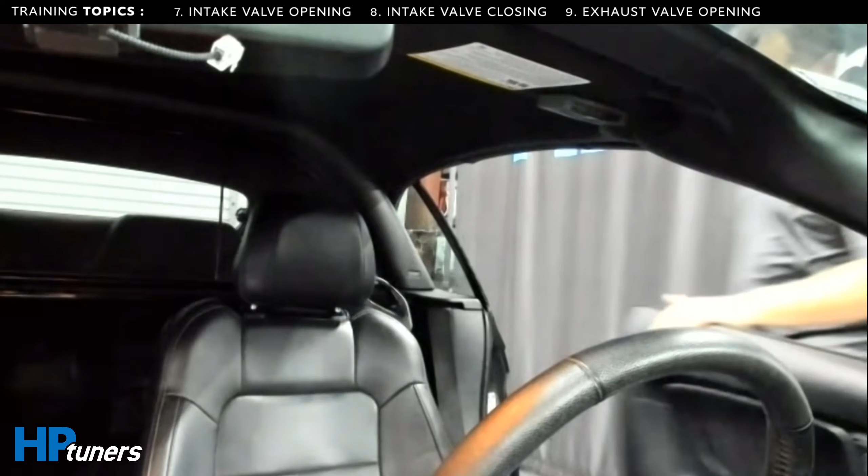All right guys, now I'm here back in the 2015 Mustang, and we're going to get started talking about today's topics. Before we get into actually tuning the car or making adjustments to the valve timing, I'm going to discuss some of the basic theory and principles behind valve timing and valve events and how that's going to affect how your vehicle is going to run. So without further ado, let's get right into it.

First and foremost, we want to discuss valves and their purpose. So what is a valve? For some of you that don't know, a valve is essentially a doorway which allows airflow into the combustion chamber and also spent air fuel mixture out of the combustion chamber through the exhaust. So you have two different valves, and the sizing of these valves has a great impact on how your engine will operate.

The larger the intake valve, typically the more airflow you can get into the combustion chamber. However, the larger you go on the intake valve, the less room you have in the combustion chamber to fit a large enough exhaust valve. Now, what's the best ratio? Well, typically your exhaust valve is always going to be smaller than the intake valve because we need to get as much fresh air charge into the combustion chamber as possible. If we don't do that, there's no purpose in having a large exhaust valve, because if you can't get enough fresh air charge, air molecules, into the combustion chamber, there's no point.

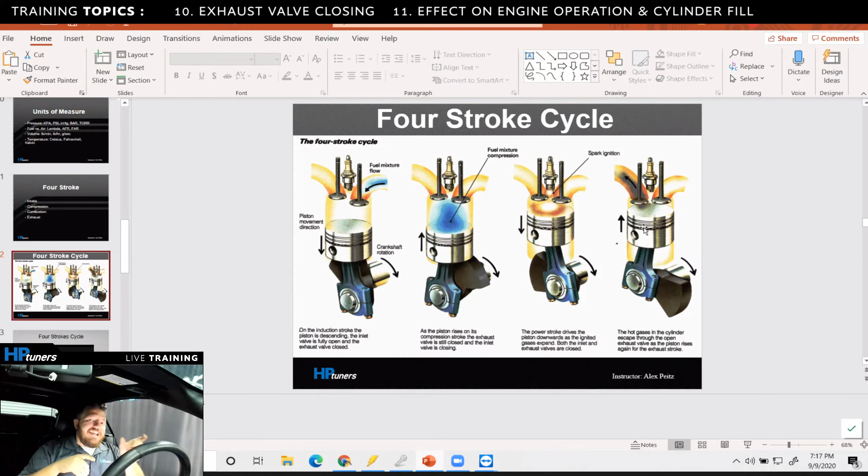But at some point before top dead center, my intake valve will start to open. Now, if it opens after top dead center, that's fine, you'll see it referenced as a negative value on your cam card. If you look at any cam card, you're going to see intake valve opening, intake valve closing, exhaust valve opening, exhaust valve closing. Typically it's going to be a positive value, pretty small, within 0 to 5 degrees or so. Sometimes it could be negative, so it really depends. But nonetheless, it's referenced in degrees before top dead center.

So for the purposes of this demonstration, let's keep it simple. Let's say your intake valve is going to start opening 2 degrees before top dead center on the exhaust stroke, right?

One second. Yes, let me maximize this for you guys. All right, that will work.

So maybe you guys can see this a little easier now. The piston is traveling back up to top dead center on the exhaust stroke. That intake valve opens, let's say 2 degrees before top dead center. And now there may be a short period of time where the intake valve is open and the exhaust valve is about to close. That period of time is referenced in degrees of rotational movement. So let's say you have 10 degrees of time in which the intake valve and the exhaust valve are both open.

That is the amount of overlap you have in this particular camshaft. Now, the more overlap you have, the less cylinder pressure you're going to generate, or you're going to lose more cylinder pressure. But that could also help with what's called scavenging. If your exhaust valve is open at the same time as your intake valve, you're actually going to take advantage of the fact that the cylinder pressure is going out and you're seeing a more negative pressure, we'll call it that. That's going to draw fresh air charge in more so than if your exhaust valve was shut. So you're using that scavenging effect to draw in more fresh air charge, but then you're going to slam that exhaust valve shut, and now you're trapping those fresh molecules, the fresh air charge, into the combustion chamber.

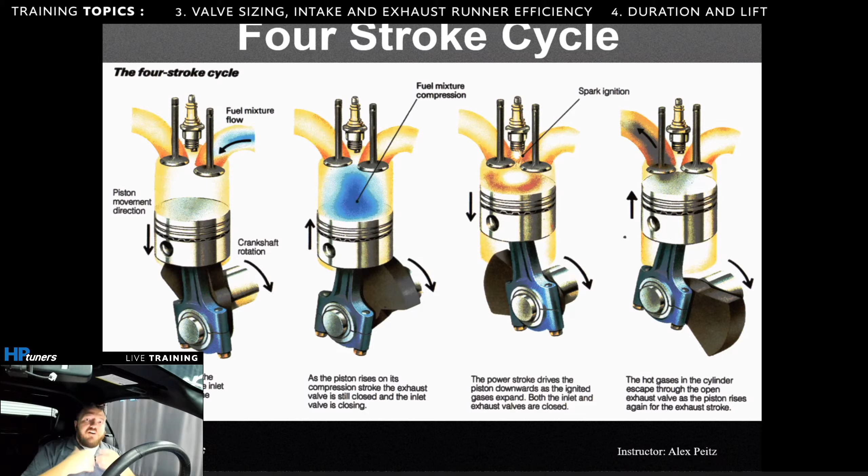Hopefully that makes pretty good sense to you guys. I tried to generalize as much as I could. Of course, it's kind of difficult because it is a pretty complex topic. I'm going to demonstrate more of how this works with the Mustang, so I think that'll make it more clear for you guys.

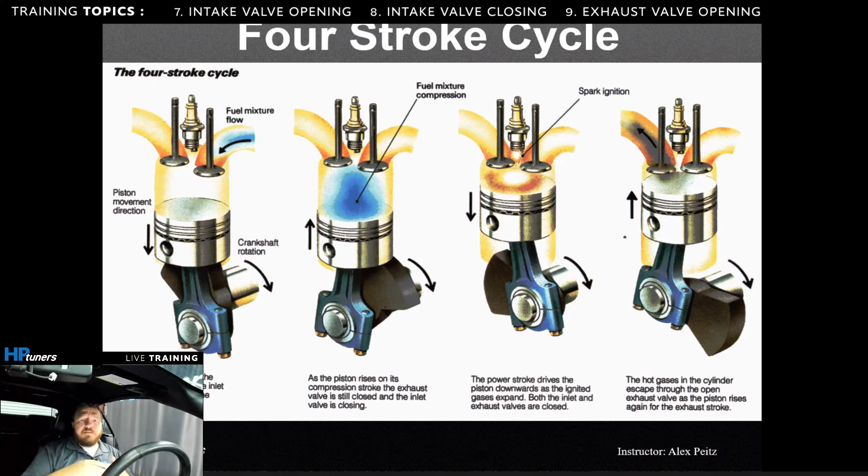Let's talk about one thing we didn't discuss really, and that's pumping losses. That goes back to our exhaust valve opening angle and exhaust valve closing angle. The earlier that we open the exhaust valve, the less pumping losses we will have because we're generating less cylinder pressure at that point—we're relieving the pressure sooner. Pumping losses is basically a loss of power due to the fact that the piston is having to work harder against cylinder pressure. So if you relieve the cylinder pressure sooner, you have less pumping losses.

Now, that could come at a cost, though, because you may lose some horsepower because you're letting go of that cylinder pressure too soon. On the back end, when the exhaust valve is opening, we talked about the scavenging—you may not get as good of that scavenging effect, because the more cylinder pressure you generate before the exhaust valve opens, the better scavenging effect you're going to get while it's open. And then when that intake valve opens, we're getting a lot more fresh air charge.

An analogy I used to teach some students back at another school I taught is, you're at a bar, right, and you got somebody... yeah, never mind, I won't get into it. But you want to get the people that you don't want in the bar... you want them out, right? You don't want people drunkies hanging around there. But nonetheless, guys, that's kind of how that works.

Let's move forward here. So, valve events' effect on engine operation and cylinder fill—we've basically been discussing that the entire time, and we could talk more about that later on, but I think we pretty well covered that. So I'm going to move forward. If you guys have questions, please let me know.

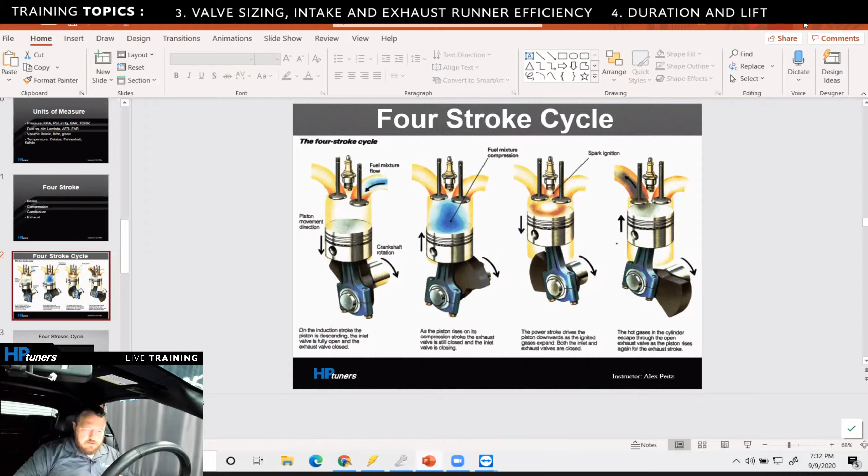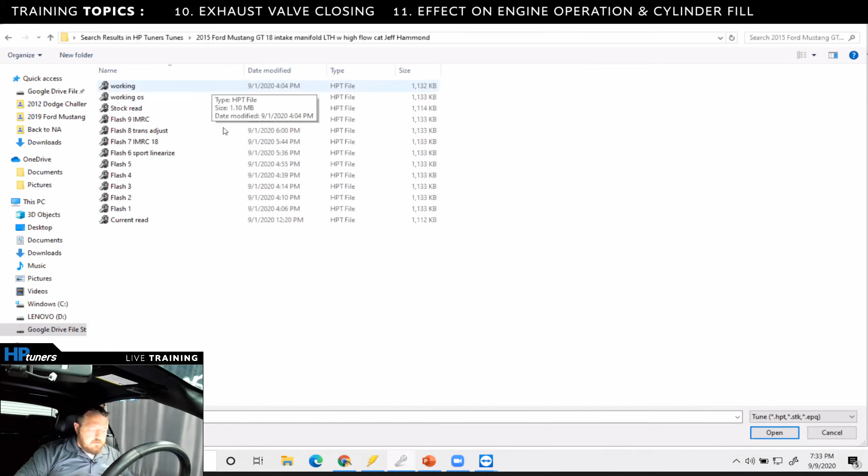So let's just show you that real quick. Let's get out of the Escape, let's go here. I'm going to open up this tune file. All right, so here's the 2015 Ford Mustang GT. Let's see here. All right, here's the latest tune file.

All right, so if we go to engine, we go to airflow, and we go to variable cam, you're going to see variable cam is enabled, and it's in twin independent variable cam timing, or TIVCT, however you want to say it. So these are basically the parameters which are going to affect our cam schedule, our cam timing, depending on RPM, depending on load, mapped points, so on and so forth. There's a lot of different variables which affect what's going to happen here.

So the first thing we're going to look at is our map points configuration, and we're going to see that 0 through 12 are enabled and 14 through 25 are enabled. So if it has a 0, that means 13, 26, and optimum power are not enabled. So that's just a good way to know what tables you're actually going to be using, or what map points are going to be active on this particular application.

Now, EcoBoost, 6 cylinder applications, they're going to have different map points enabled. So that's going to be another factor as well. For example, the Gen 1 Coyote in a 2011 Mustang is going to have optimum power cam schedule active versus this one, optimum power map point active versus this one does not. It still has a cam schedule for optimum power, but it's just not going to use the OP mapped point. Instead, it's going to use a combination of different map points based on our valve timing at that point, or our cam position at that point.

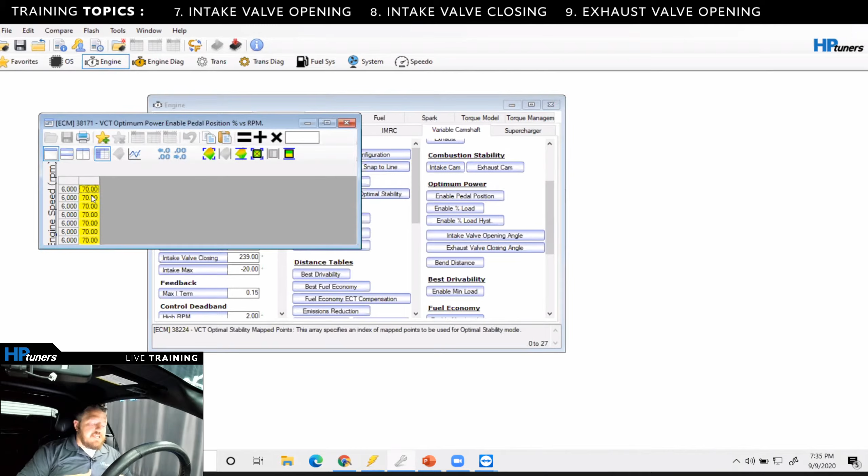So for the purposes to keep this easy, we're just going to look at the optimum power cam schedule. So there's enable pedal positions for that. This is set to 70% pedal, so 70% pedal and higher will actually enable optimum power cam schedule. This is our enable load, and so basically at 4,250 RPM, 91% load will enable optimum power cam schedule.

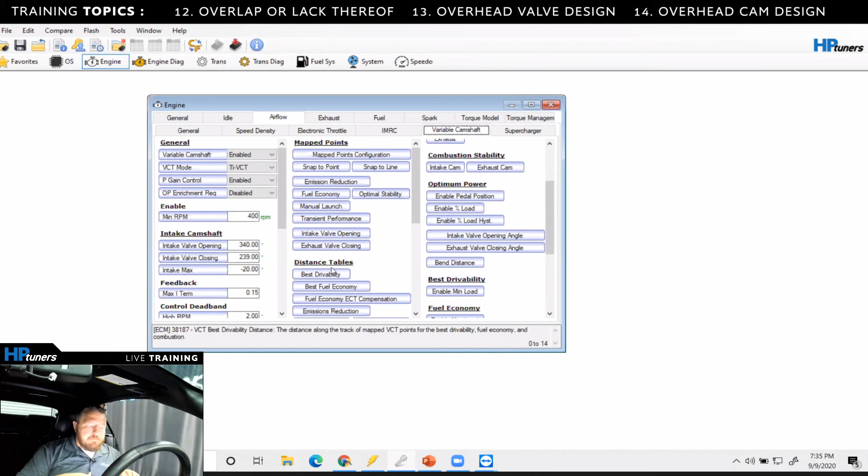So once it's enabled, it's going to disregard any of the other tables which you have under mapped points, under intake camshaft, whatever it may be. It's going to disregard this, and it's going to use this intake valve opening angle and the exhaust valve closing angle. So the intake valve opening angle looks like this, and we have our exhaust valve closing angle, which looks like this.

As RPM increases, our desired intake valve opening angle is going to change, and our desired exhaust valve closing angle is also going to change. Now, Ford references intake valve opening angle versus intake valve closing. It doesn't really matter, it's kind of the same difference, right? Because our duration, again, is fixed, so that doesn't really matter.

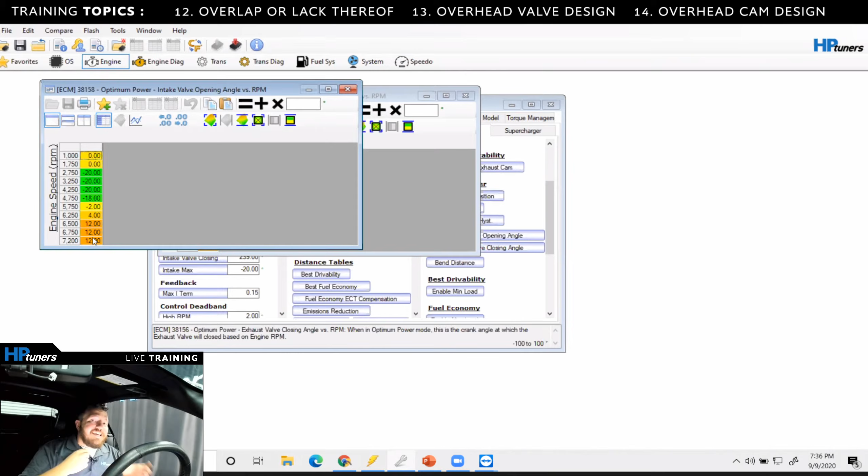So when you get to looking at the intake valve opening angle, you may not know what this means, right? Because we have -20, we have -2, 4, and 12. So this is just a reference point from the base position of the intake cam. So if we see -20, that means that intake cam is advanced 20 degrees from the base position. So that may be great for lower RPM to gain some low end efficiency potentially, depending on the application.

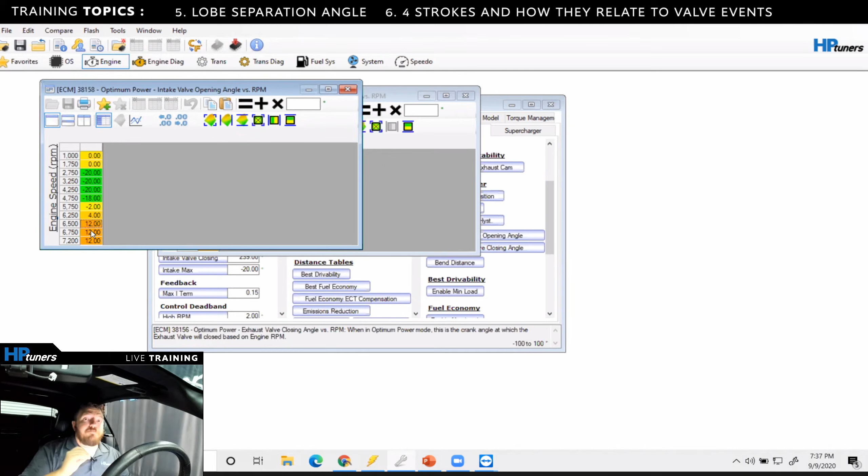But you don't want the intake valve opening angle too far advanced when we are trying to make power at higher RPM, because we have more engine speed. So we need to compensate for that by opening the intake valve later. As you see in this particular application, as you get to higher RPM, we have positive values. So that is degrees retarded from the base position. That means we've retarded 12 degrees from the base position, versus -20 means we're 20 degrees advanced from the base position. So if it were 0, it would be at its home base, its home position. Just keep that in mind.

And also, that angle at which the cam is at its base position is referenced in the calibration as well. I believe it's right here at 340 degrees. But to keep it simple, we're not going to get into all that right now.

So let's look at the exhaust valve closing angle. In this particular table, it pretty much is 8 and it becomes 15 degrees. That's pretty ideal for a car that may have different exhaust modifications, because that goes back to pumping losses. Now, in an off-road application, if you have a set of long tube headers, for example, on a race car, you're going to want to retard the exhaust valve closing angle, because you want to take advantage of that scavenging for as long as possible. The more efficient your exhaust is, the better you're going to get that high pressure out into a low pressure, because fluid flows from a higher pressure to a lower pressure. So we're taking advantage of those fluid dynamics, and we're going to use that scavenging to our advantage.

So the later you close the exhaust valve, the more fresh air charge you're going to draw in by taking advantage of the scavenging effect. So when we have a race car with long tube headers, whatever it may be, we typically want to retard our exhaust valve closing angle. But this will vary depending on your application.

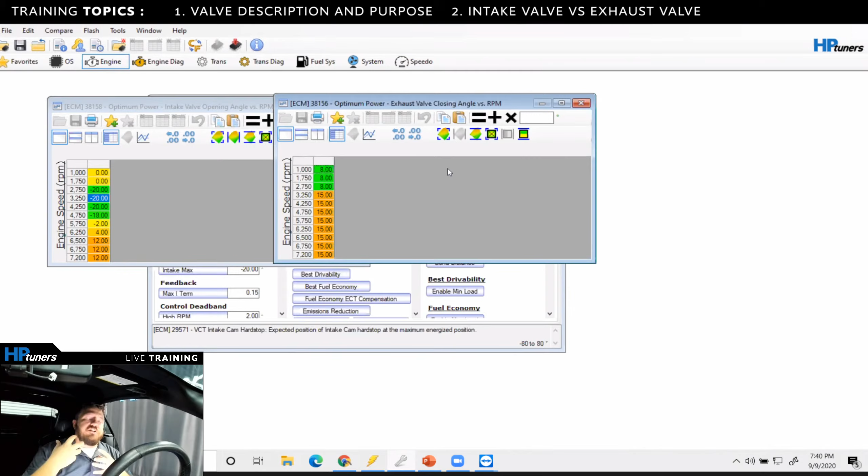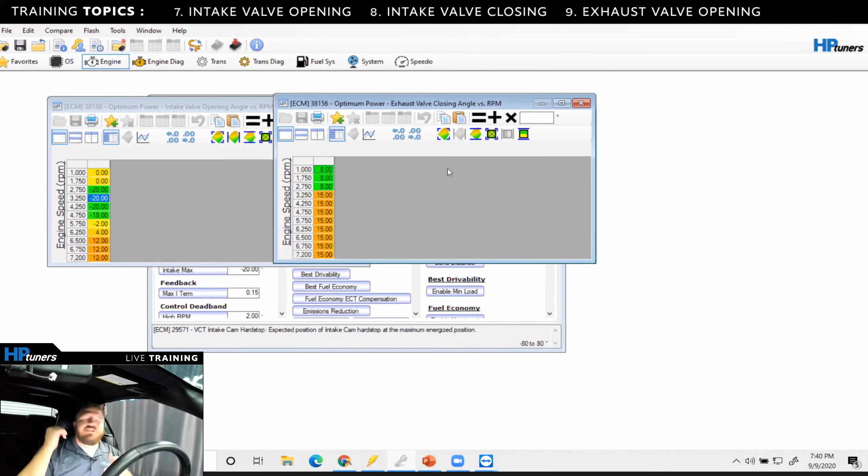Because with EGR, we can create a natural exhaust gas recirculation by affecting our cam position at lower RPM. Typically, you're going to see in some applications they retard the intake valve opening angle at lower loads and lower RPMs to create a natural EGR effect. So you're going to get some of those inert gases coming back in or staying inside the cylinder, so you have less unburnt gases essentially going out the exhaust. That's in a nutshell how that EGR effect is working.

So now we no longer need EGR valves. That's pretty awesome because those were a pain, we all know. But nonetheless, we can affect our EGR and improve emissions and clean air by adjusting our cam schedule. That's pretty cool.

20 years ago, people would be like, wow - maybe 30 years ago now, the time gets away from me. But nonetheless, what a great time we live in, guys. All right, so let's move on.

Considerations when choosing a camshaft. We've kind of been talking about this the whole time, but guys, just remember what you're doing with your car. It may seem awesome to have that big choppy cam, but there are downfalls, and I tell this to my customers all the time. Yes, it sounds cool, however it's not going to drive like stock.

As much as we can try to adjust the calibration and get darn close, I've got a lot of big cams out there driving like stock cars, don't get me wrong. However, there are always going to be some fallbacks, some considerations you're going to have, and you'll have to be able to live with that. A lot of guys, you typically don't want to go as big as possible because you're probably going to be let down - it may not feel as peppy, may not feel as low and torquey.

So just bear that in mind when you're trying to choose the right camshaft for your application. Also, what you use the car for - do you daily drive this thing at all, drive it to work or whatever? You probably don't want a big choppy cam because you're going to make your neighbors kind of upset when you're waking up in the morning and cold start's going to be pretty obnoxious. So just things to consider, guys.

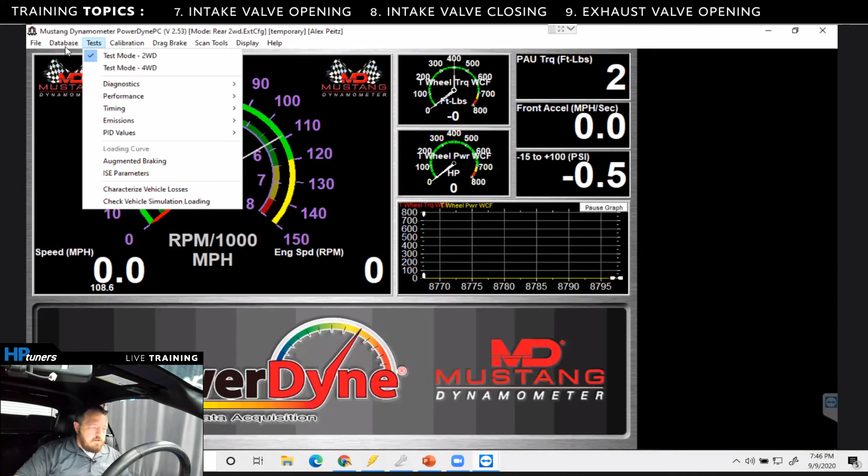Now, the original power this car made - let's pull that up real quick on the dyno screen. There's Jeff.

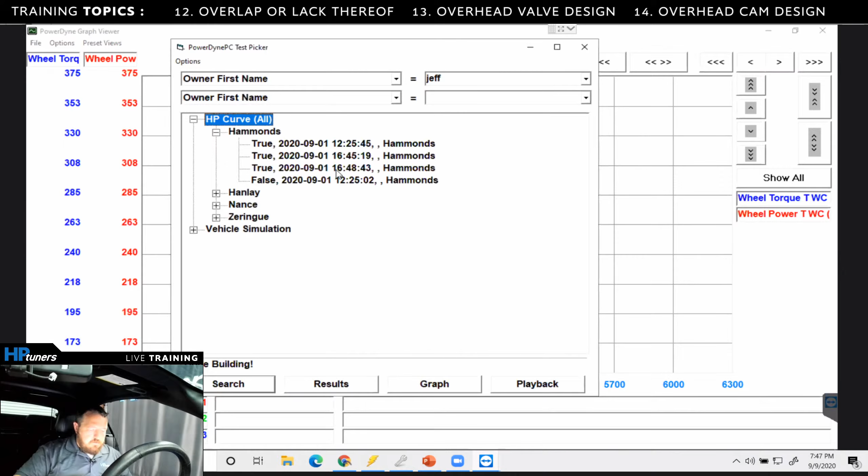So I believe our best time is here. Okay, let me adjust the scale here a little bit for you guys. Q&A. Oh, yep. Bear with me one second, guys.

All right, guys, so here's the dyno screen. This is what we made in this car and the best pull. So I believe it was about 371 horsepower and 329 pound-foot of torque.

Now, I have a Mustang dyno, so it does read lower than some of your Dynojets out there. And this is SAE correction factor. Some Dynojets are in standard. We're going to have a whole live training seminar on different dynos and how those affect how the car is going to read. We'll get more into that later, but for now, let's just keep it simple.

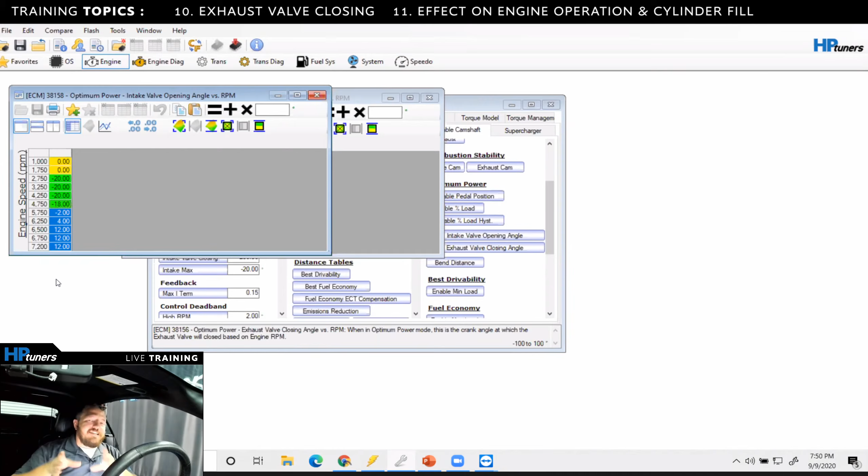So for the purposes of showing you the effects of advancing the intake valve opening angle, we're going to set the entire thing from 2750 RPM and up to -20. So we're going to advance the intake cam 20 degrees from our base position. Highlight from 4750 and up and input -20, equals. So now we have fixed our cam angle at 20 degrees advanced from our base position.

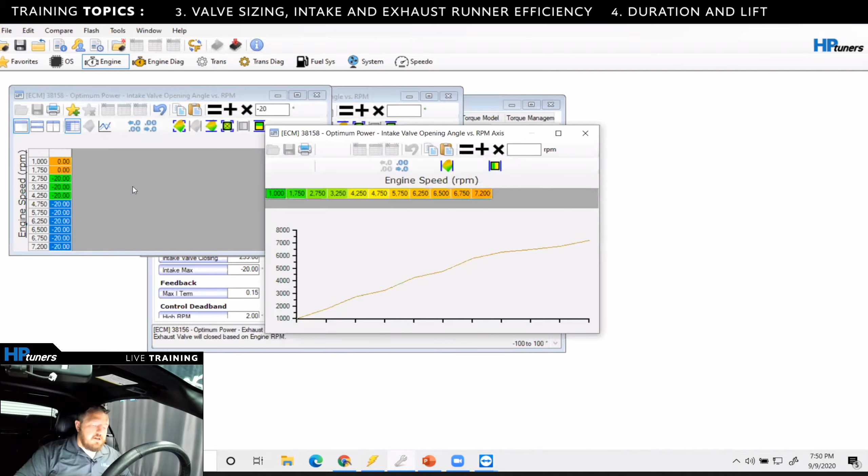For the exhaust, we are actually probably going to keep it at 15. But one thing you want to make sure of is that your scaling is the same from here to here, so let's just verify that. If you guys didn't see what I did, I just left clicked on engine speed and that popped up our scale. We're going to left click and drag from 1000 to 7200.

We're going to copy that. We're going to open up our exhaust valve closing table. We're going to click on engine speed. We're going to left click, paste, and it's the same, so we're good. All right, so our scaling is the same. It's normalized the same.

So from 2750 and up, we're going to put it to 15 degrees retarded from our base position. Again, positive values are in degrees retard and negative values are in degrees advanced. So there you have that. And now we can save this file.

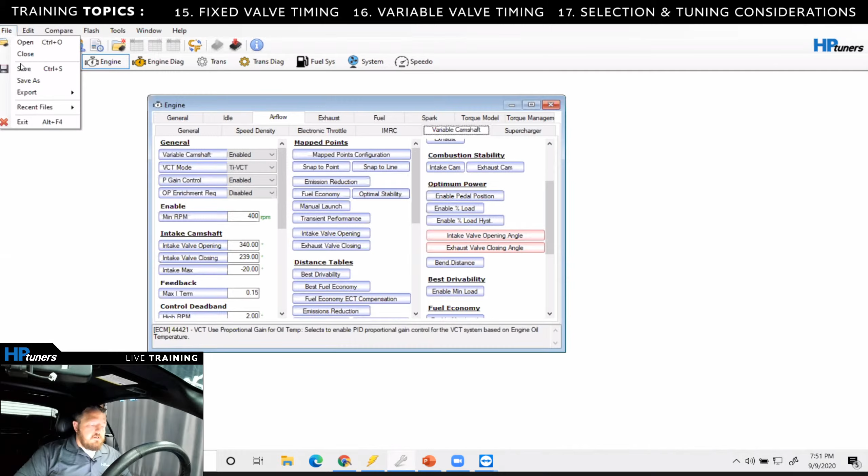All right, so we saved the file. Now we want to flash to the car, so let's go ahead and turn the ignition on. To write the vehicle, we're going to click on Write Vehicle. Also, you can click on Flash and Write Vehicle, or Control W, I believe, as well. So now it's going to pop up.

This is a Tri-Core 1791 engine control module. This is our operating system. This is our VIN. Obviously, you want to make sure that you're flashing the correct VIN and OS, or operating system, into the correct car that corresponds.

So you want to make sure before you flash a car that you don't have any unnecessary electronics going. You don't want to have your cable or your laptop hooked up to the outlet or the cigarette lighter outlet and powering the laptop. You don't want to have that happening because that could cause other issues. So just be smart about this, guys. Make sure your lights are off, so on and so forth. So when we go to flash, we're just going to click Write.

All right, so now it's going through the process, downloading the bootloader. Now it's going to erase what's currently in it.

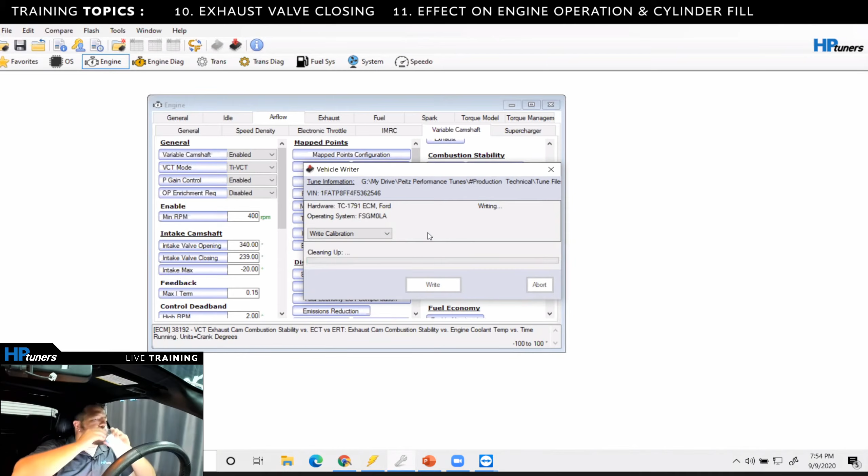So we got 10 seconds left here. All right, follow the prompts. Okay. All right, write completed.

And now we are ready to start the car, and we are going to do our test.

Yeah, you can go to the audio. The car audio is shut off right now.

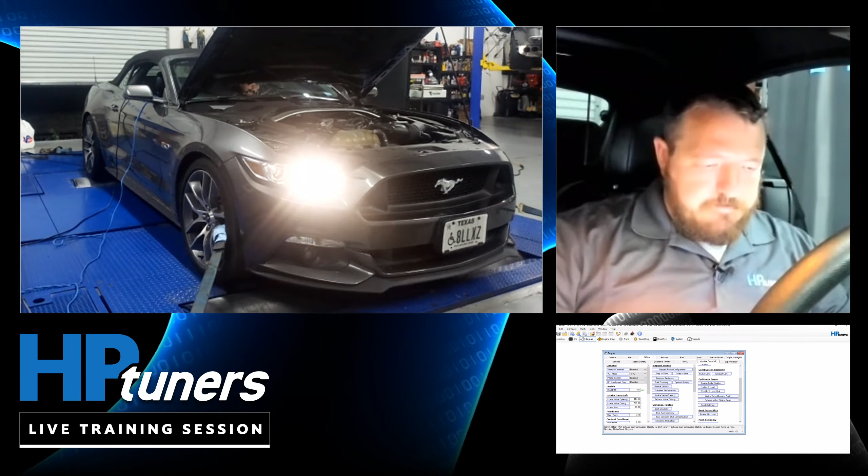All right, guys, give me a second just to set everything up, and we'll be ready to rock and roll.

So we're not going to do a pull all the way to, I think we did 7,000 before on this car. We're probably just going to do a pull to 6,000 because we have the intake valve opening angle so far advanced. We're going to really start to see power dramatically drop off after probably about 4,500 RPM or so. But hopefully before that, we pick up more torque and more power. So we're going to find out here pretty quick.

Now we're going to go back to our scanner, our VCM scanner, so we can log all the data and you guys can follow along. So we want to go connect to the vehicle, where you have to make sure the car is running or the ignition is in the on position. We're going to go right here, connect the vehicle. Okay, and then we're ready. We're going to start scanning.

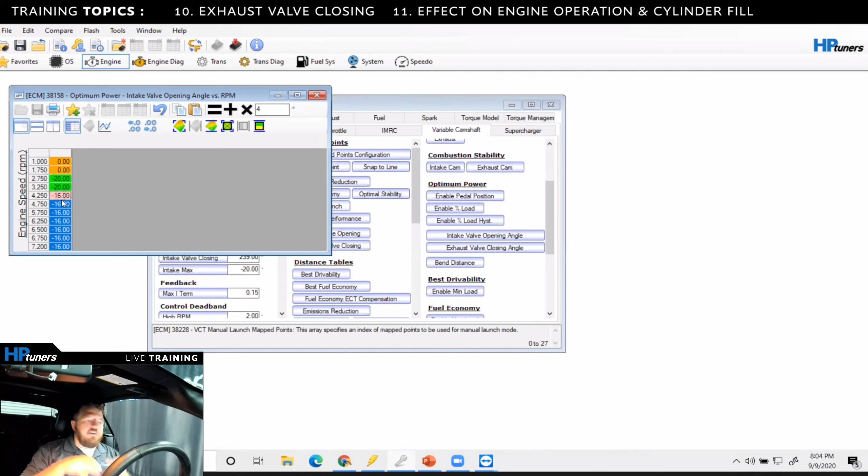Now we're going to try this first. We're going to do another pull right now and see how it affects it. We might have to expedite just a little bit for the sake of time, but nonetheless, you guys are getting the effect right here in the flesh. So let's save this tune file.

Okay, ignition on. We're going to go to Write Vehicle. And we're going to flash.

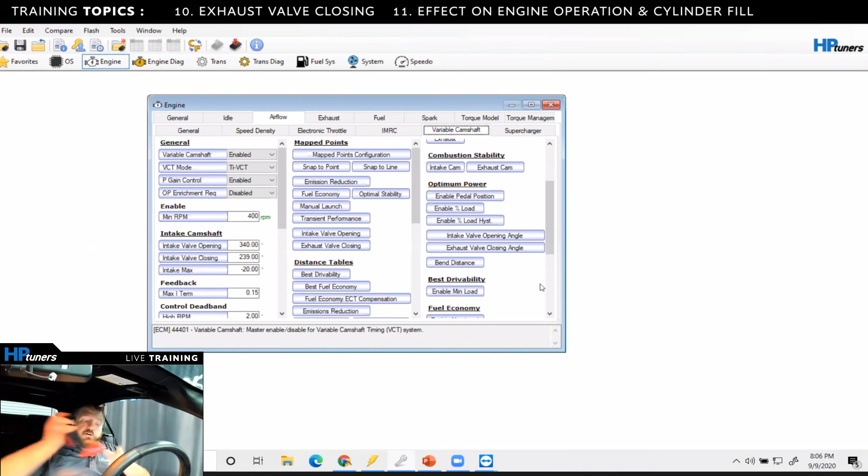All right, 3 seconds. Now we're going to go back to the dyno screen real quick, make sure that's set up. All right, we're going to do another pull from 3,000 to 6,000 RPM and see where we're at.

All right, guys, let's get rocking. Wait for our widebands to come online here. There they are.

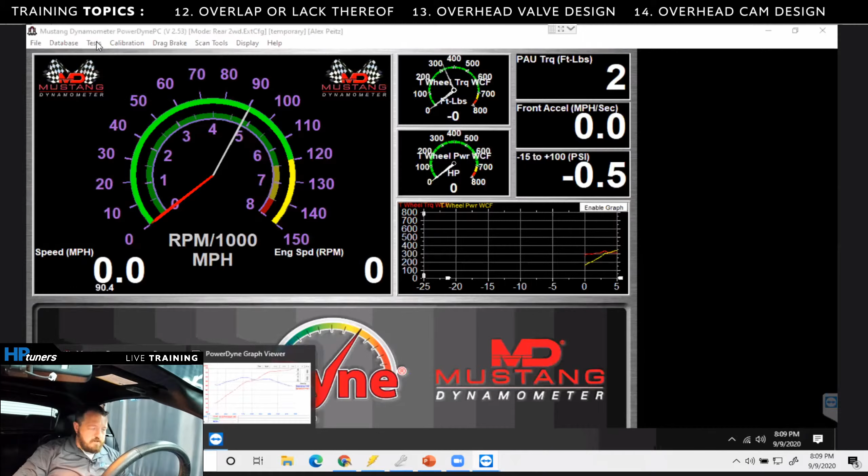One second. I see what the problem was. We need to go back. We need to change the vehicle. Okay. My apologies, gentlemen and ladies.

All right, so baseline.

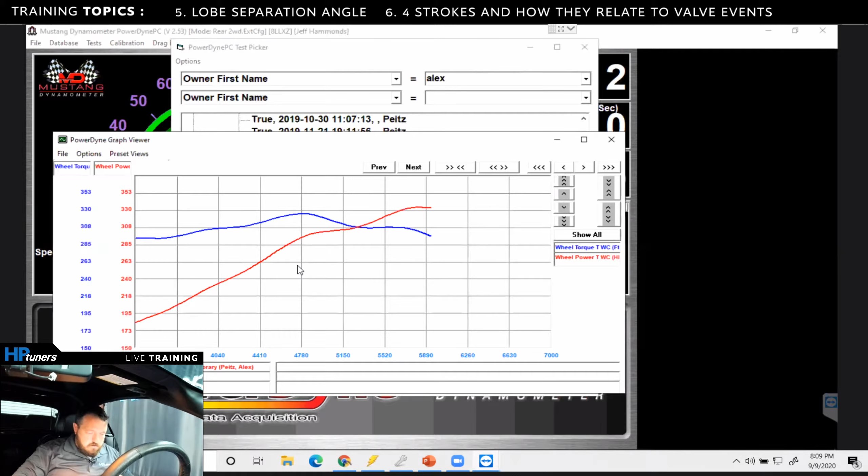So the solid line was our previous pull where we had the intake valve opening angle fixed at -20 degrees. The dashed line is our most recent pull where we actually retarded the intake valve opening angle 4 degrees from 4,000 RPM and up. You guys can see a direct correlation with our adjustments. Now, it didn't make much effect at 4,000. We saw a little bit of a gain after 4,000, but it pretty much went back in line with our previous run after that. So we may need to retard the intake valve opening angle more after about 4,200 RPM or so to gain some more torque back.

But if you look beyond that, from 4,700 RPM and up, we actually did see a little bit of a gain in torque, I'd say probably 10 pound-foot at most. But we are seeing that we're going in the right direction. You guys are starting to see how retarding the intake valve opening angle is going to gain you torque as you see higher RPM. That is the purpose of this demonstration for you.

All right, so let's go back and let's keep it going here, guys.

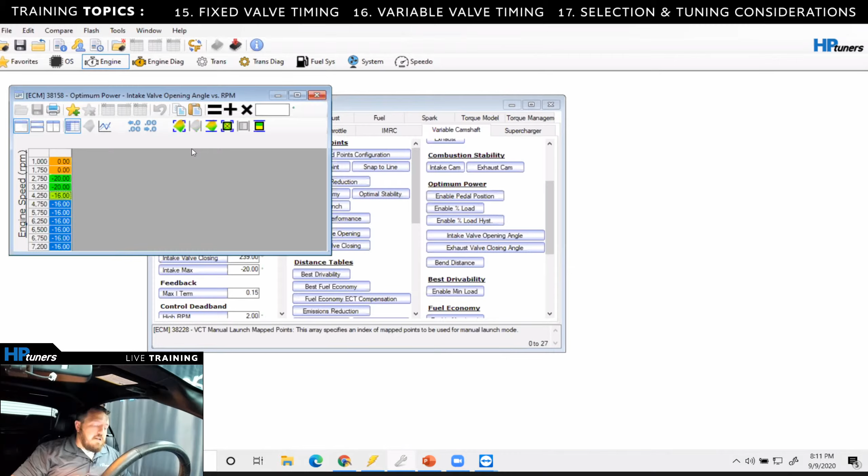So let's go back to the tune file, and let's open up our intake valve opening angle table and see if we can make some more adjustments. Go to intake valve opening, and we have -16 from 4,250 and up. Now, I'm going to go out on a limb, and I'm going to say that we can still retard at least 2 degrees everywhere, right? Because we still need to see more of a gain after 4,000 RPM. So we need to retard at least another 2 degrees across the whole board from 4,250 and up. So +2, right?

Now, so that retarded another 2 degrees. So let's go back to the dyno graph real quick to assess that.

All right, so in the tune file, we adjusted from about this point and up. So we're hopefully going to gain a little bit more torque right here where we didn't see much of a gain on this most recent run. And then we're hoping to see even more gain through this range.

Now, I'm going to get a little bit more aggressive. I'm going to retard the intake valve opening angle 2 more degrees from 4,700 or 4,500 and up, right? So go back to the tune file. I know I'm skipping around here, I apologize. So we're going to go from 4,700 and up, and we're going to retard another 2 degrees. And we are going to do another test and see where that gets us.

Now, if it doesn't give us huge gains, I'm going to go a little bit more accelerated to try to get back to where we were at. So let's save this.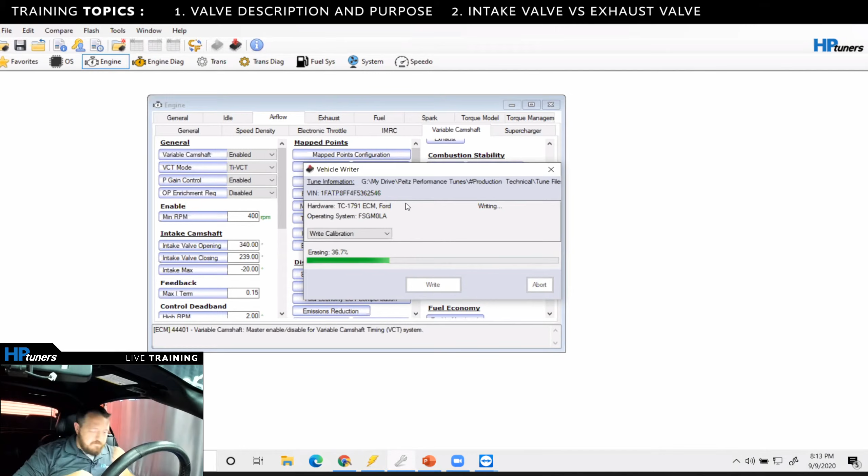Sorry, guys, this bug is just liking me tonight. A little Texas humidity, you know.

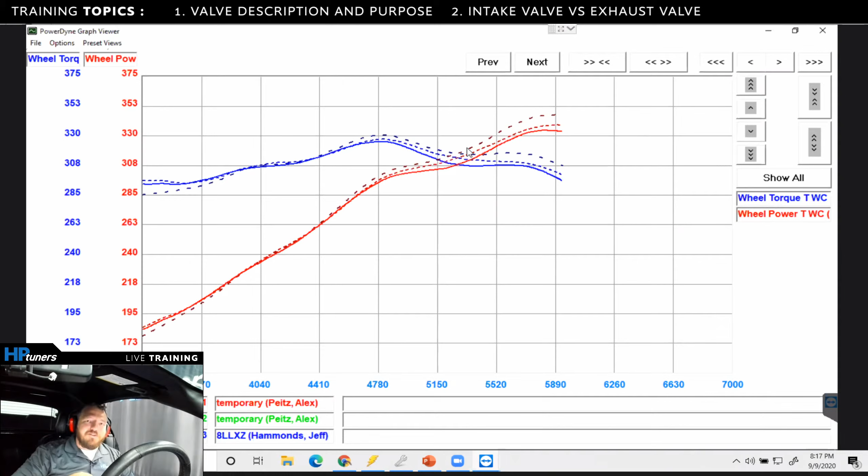Wow, big gains on that one. It really, really, really likes the intake valve opening being retarded as we go higher RPM. And it's really cool to be able to show you guys this in real time and let you see the effects directly on the dyno. So that's pretty exciting. That just shows you the power of the tool too. I mean, you can't beat it, guys.

So let's see where we're at in reference to our actual baseline as well. Unload. Baseline.

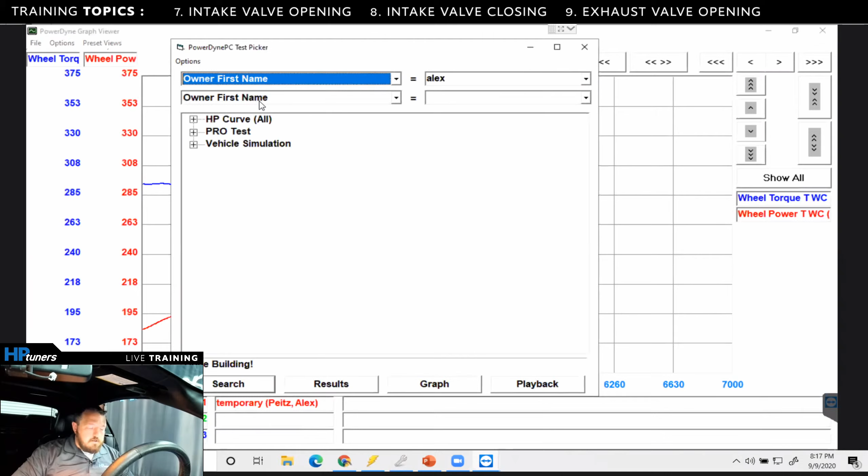All right, so if you look at where we're at in terms of our baseline, we're back where we were pretty much everywhere. We have gained a little bit of torque down low, 3,800 and below, which may help a little bit. Granted, sometimes you're not going to see as big a gain. It really depends on the application and what combination you have.

Now, again, this is an 18 intake manifold with IMRC on a 15 Mustang. So we may or may not see more gains than what we already had from my current cam settings I had in the car. So just bear that in mind, guys.

All right, so let's compare with our last test we had. We're gonna have to go back to me. So I saved it under my name.

All right, so if you compare from our current run to our last run, we definitely pretty much picked up everywhere. Now, we're still not as high as we were originally with our baseline, but we're heading in the right direction. So it's possible that if we retard our intake valve opening angle a little bit more after 4,200 RPM, we may see more torque than what we had previously.

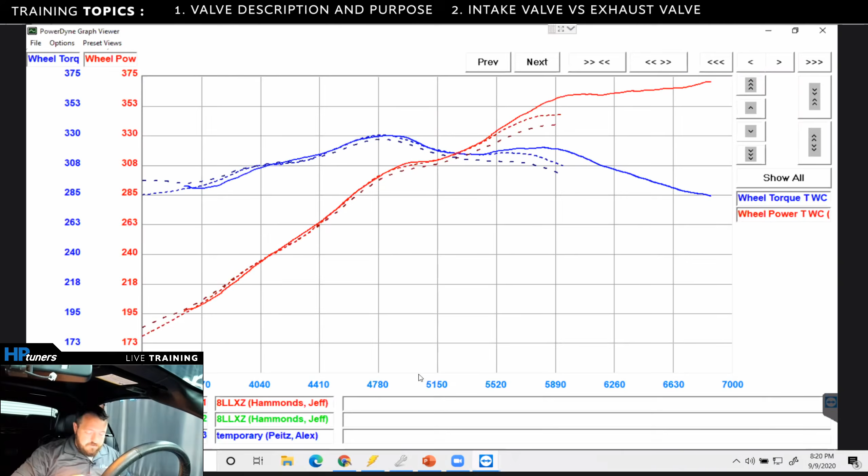All right, so 4,200 and up in RPM, we are going to retard 2 degrees. Okay, and now where we want to try to make more power, we're going to go back to the graph one more time. So again, that was about 5,400 RPM and up. We're going to retard more on our intake valve opening angle to try to gain more power back and maybe make more.

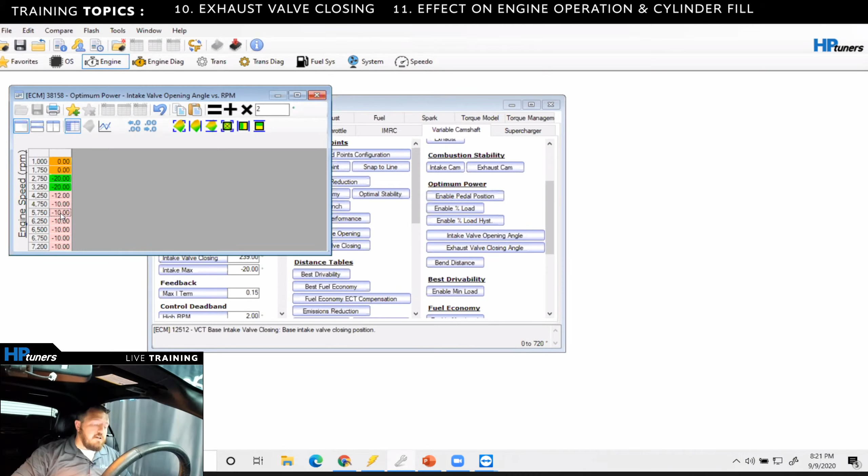So we have a little bit of a break between 4750 and 5750. Again, sometimes the normalization can affect the resolution you have in one range, so you can change that. Again, I'm going to try to keep it simple and not do that, just to not murky the waters, because we've already been using this normalization on the y-axis. So let's just go from 5750 and up.

And let's retard another 2 degrees, right? Let's see what we get. But this time, I think we're going to try to do a pull to about 6,800 or so. So let's just go for sake of time. Let's retard more so from 6,250 and up. Now we're going to see how this gets us, or where this gets us, and go from there.

All right, we're going to go key on, or ignition on, excuse me, and we're going to flash. Write calibration, click Write. Okay, we also need the scanner. I do that all the time. I get too excited.

You just have to disconnect the scanner when you're done before you go to drive the vehicle. Otherwise you get that error. It's just user error on my end—I forget to disconnect the scanner when I'm done.

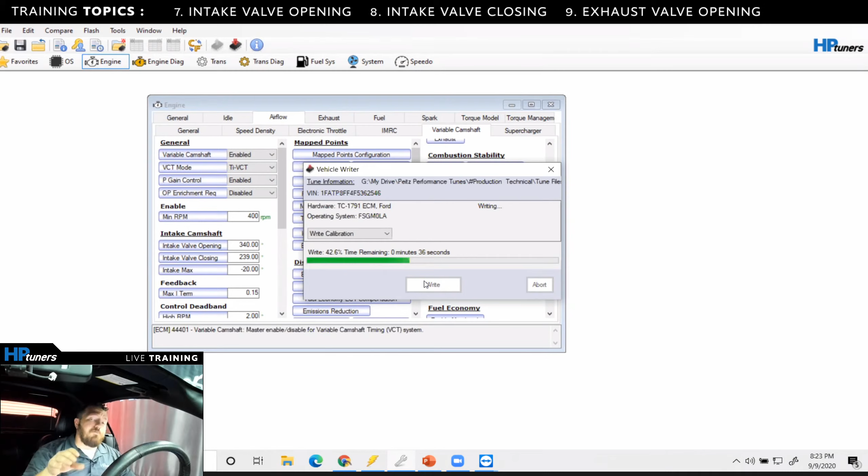Great question from one of our viewers: how are we disabling traction control for the dyno? On the S550, there's an ABS fuse that I pull. There's multiple ways to do it on this application, but disabling ABS is the best way. If you just hit the disable traction control button, it works somewhat, but you'll still feel the ABS pulse the brakes on the S550. So I take it a step further and pull the ABS fuse—it's just a 15 amp fuse, I think—and then it's good to go. On other cars you don't need to go that far, you don't even need to pull a fuse. Usually you just disable traction control, and after it sees the rear tires moving and not the front, after a given period of time, it just throws an ABS fault and lets go. So it just depends on the application.

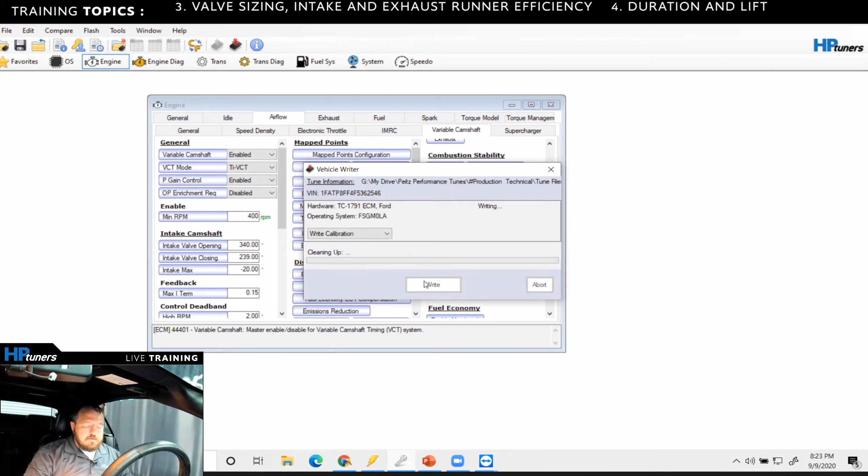Ignition off. Back on. All right, let's see if we make some more power, guys.

Yeah, we're gonna do a pull now to about 6,700 RPM. I'll go to 68.

Just waiting for the wide bands to come online. We'll be ready to go. All right, ready to go.

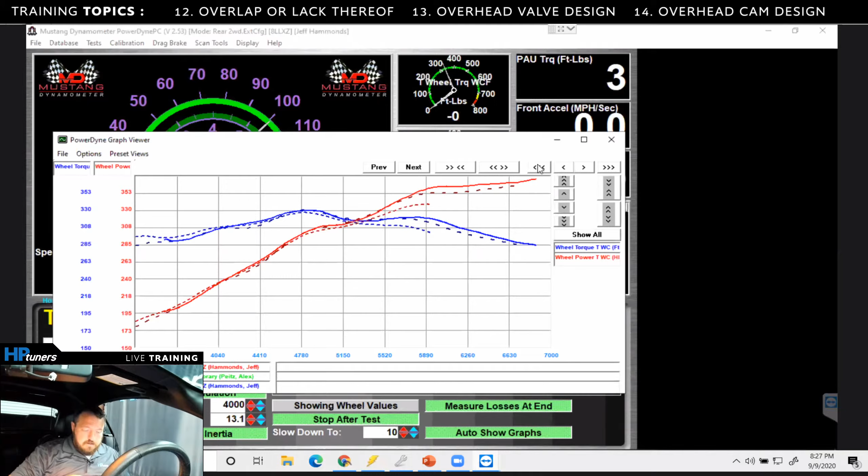All right, so we're gonna open up our last run and take some of this stuff off of here. So that was our last pull—second to last pull—and here's our last pull.

So you can see we actually lost a little bit down low. We did adjust from 4250 and up, so we might want to go back and put our cam schedule, our intake valve opening angle from 4250 to about 5,000 RPM, back to how we had it in the previous revision. However, we did pick up on the top end—right after 5,000 RPM we started seeing a gain in horsepower and torque, which is what we're going for. Where it was falling off at 6,000, we continued to climb and make more power. So we're really close to our baseline now, and we're going to try to see if we can exceed that. Let's get going on that.

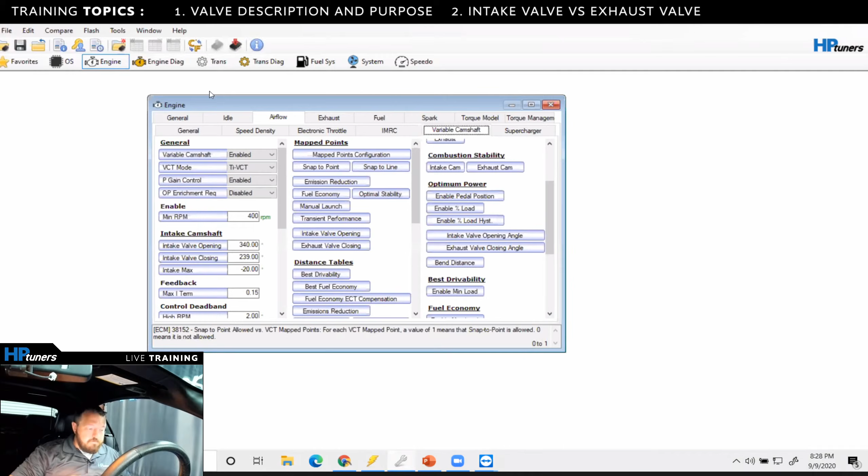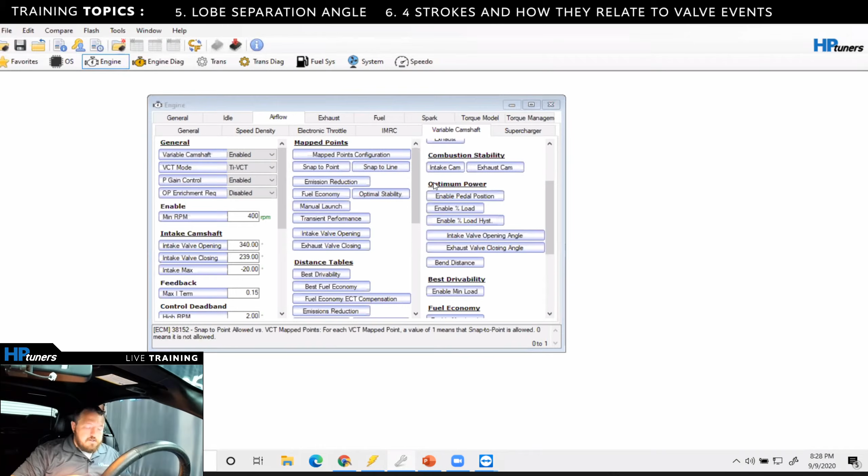All right, so go back to the tune file. Now for comparison, I'm going to open up a comparison file from our previous revision to see where we were at up to 5,000 RPM, and we're going to put those settings back. To do that, go to compare, open compare file, and we're going to find bracket cam 3. Now you can see it's going to highlight green to indicate where we have differences—our intake valve opening angle is where we made our changes. So to show compare, click show compare, and from 4250 to 4750 we have -14 and -12.

We now have -12 and -10. As we saw in the dyno, we did see a reduction in torque at that RPM range, so I'm going to put it back to how we had it in hopes that we gain some of that back on the next pull. So let's highlight 4250 to 4750, copy, paste—right, so now we've got that adjusted accordingly.

Now we want to see if we can gain more power, so let's see what we can do. Let's go back to the dyno graph and compare with our baseline. So, second test, load.

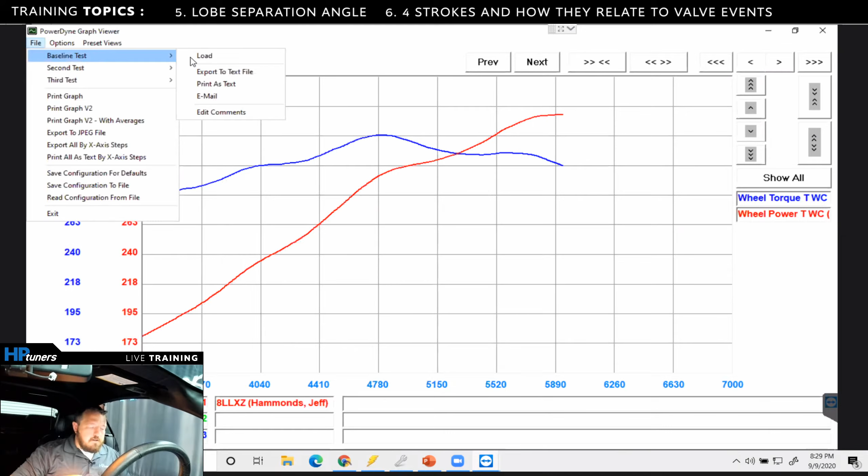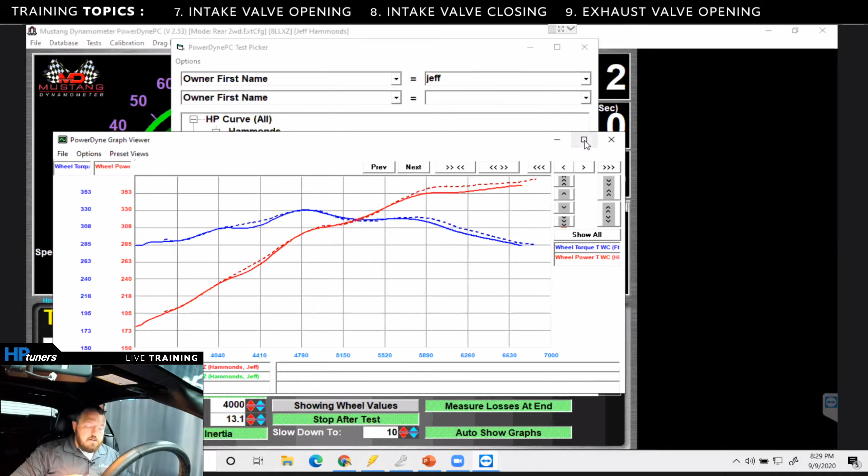Baseline will be our last test, sorry it's a little confusing. Our second test will be the file from before last week. We're going to adjust that, so that shouldn't be a problem. We're about the same from 4,700 to 5,600 or so, but after that the original baseline is still higher. So we know we have more work to do from 5,500 and up. We need to get going on that.

So let's go back to our tune file. From 5,750 and up, we need to retard our intake valve opening angle even more yet. So for that, let's retard it 3 degrees and take it one step further. Let's just keep it at that and see where it goes.

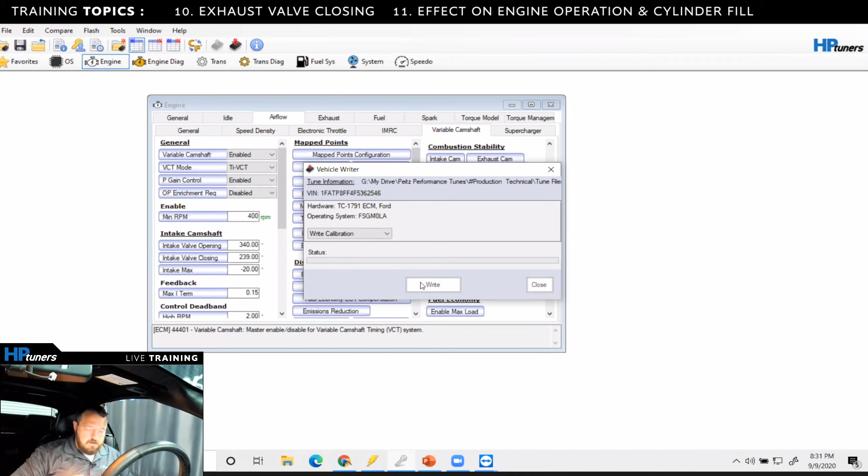I can keep going for as long as we need to, but we're about done.

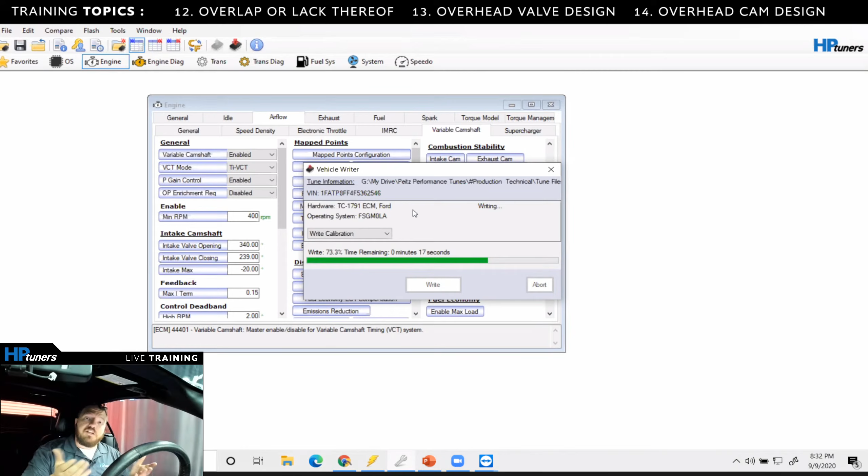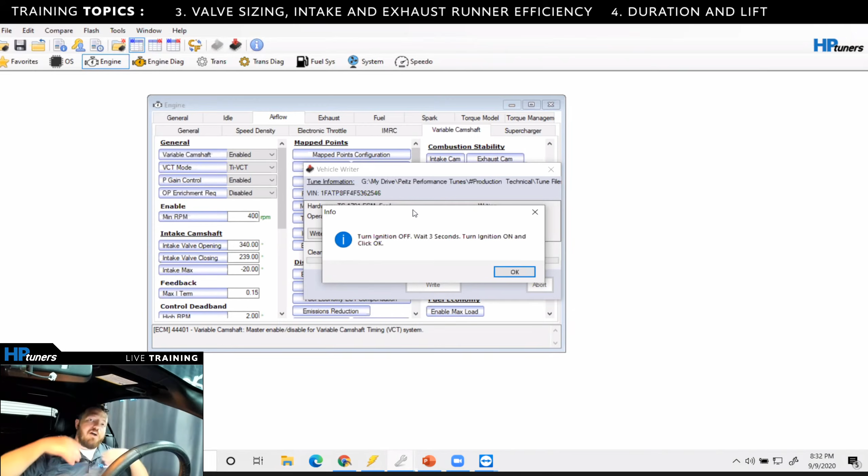So guys, just to kind of recap what we've been doing for you guys that may have just tuned in: we basically started with bracketing the camshafts. We fixed the intake valve opening angle, we fixed the exhaust valve closing angle, and we're measuring our gains or losses from that. So we're essentially chasing the torque back as we go. We're seeing where it's less than our baseline, and we're retarding the intake valve opening angle from that point and up. We're watching as we go, chasing it back, trying to gain more power, more torque. But even if we get back to where we started, that's okay, because I wanted to get you guys familiarity with how this works. This process will gain you power in certain applications, it just kind of depends.

All right, so the flash is finished. We're going to do another pull, and we'll be about wrapped up here, guys. Then we'll do our Q&A so you guys can win that MPVI 2.0 with 2 credits. So that's coming up here real quick, guys.

All right, just waiting for the widebands to come on, and we will get going on this. Let's see if we can get some horsepower and torque back out of this bad boy. All right, ready to go.

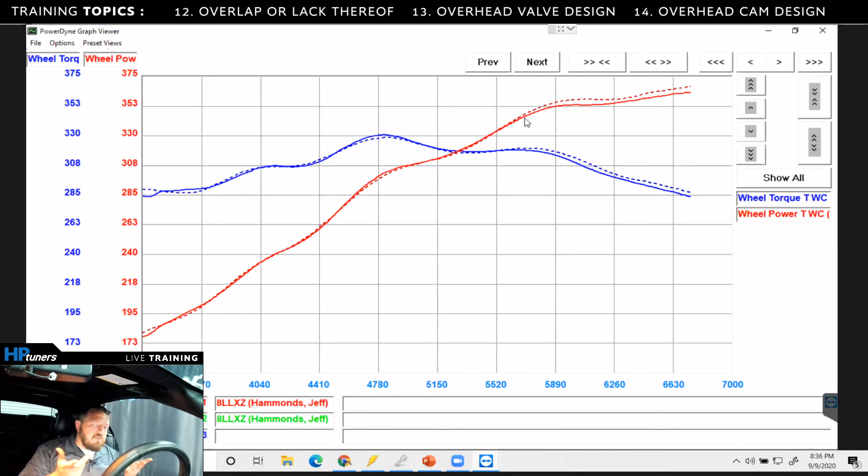All right, so we definitely picked up from 5,500 and up, and that's really where we made most of our adjustments. We're kind of teetering around the same range on the torque, but at the lower RPM. But we also have the effect of heat, we have more temperature as we do more pulls, so obviously that's going to be a factor as well. So I'm not super concerned about that, we're right around where we were anyways. A fluctuation of 5 to 10 pound-foot of torque is relatively normal. So nonetheless, you see the gains that we are seeing from 5,500 and up.

Let's compare with our baseline now, the original test from last week.

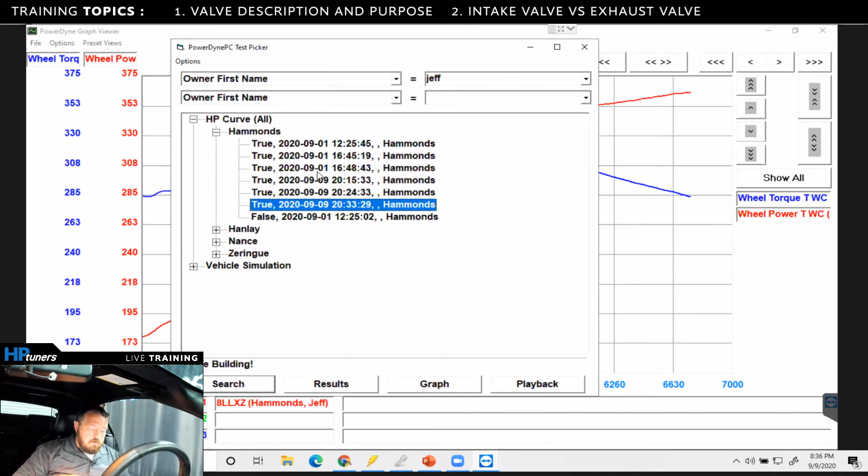Okay, so we're getting closer, but we're still not quite there. So we're going to kind of do a Hail Mary here and see where we can get with it, because we're about wrapped up with time. And if we kept going, you would see the gains back. This is how the process works, and that's really the basis of what I wanted to show you guys. Obviously I want to show you guys making more power, but if we don't get there tonight, that's okay. We just want you to see the effects of the intake valve opening angle being adjusted and the exhaust valve closing angle being adjusted, and inversely the others.

All right, so we're going to try one more here from about, say, yep, about 5,500 and up. So we go back to our intake valve opening angle, 5,750, and we're going to retard another 3 degrees.

Ask that again, sorry.

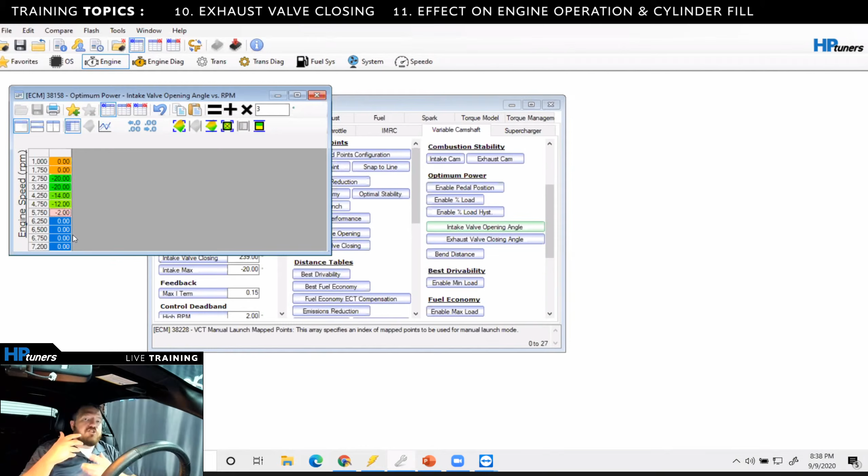So there's a question about over retarding the exhaust valve timing. If you over retard it, meaning you close the exhaust valve too late, you actually lose some of the cylinder pressure you would have had. Ideally we want to take advantage of the scavenging effect of having the exhaust valve open, but if you have it open too long, you'll lose some of that fresh air charge that you want to stay in the cylinder. You'll lose it out the exhaust, so you definitely don't want that.

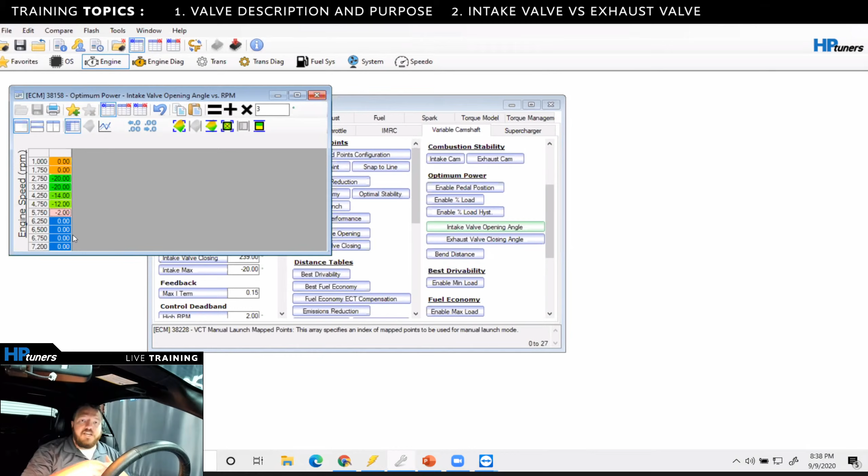That's also kind of what can happen with too much overlap, the same type of effect you're going to see there, so you have to be careful with that. If we had more time, I would go back and keep our intake cam timing where it's at, and adjust our exhaust cam timing, advance it and then retard it back to see where it makes the most power. That's a great question, and I appreciate it. I hope I was able to answer it effectively.

All right, so to recap, we retarded the intake valve opening 3 more degrees, and retarded an additional 3 degrees at higher RPM. I know it's going to want a little bit more than that, so we might just go ahead and go from 6250 and retard it another 2 degrees, and let's see where that gets us.

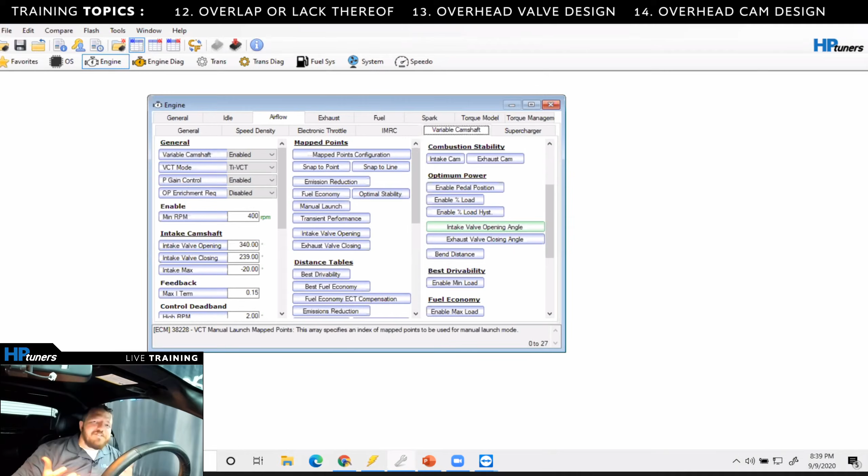I appreciate you guys' patience, by the way, because we are doing multiple revisions. It can get a little dry, so I'm trying to keep it as interesting as possible, and hopefully you guys are liking it. I did it again - will he ever forget? Will he ever remember? I appreciate the feedback.

It's just a built-in delay where they wait for the heater to heat up so much before it allows the wideband to output a signal to the ECU, basically.

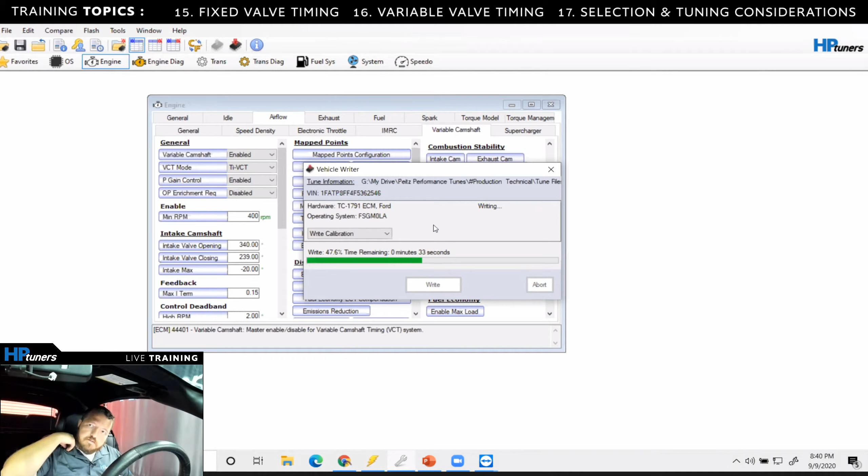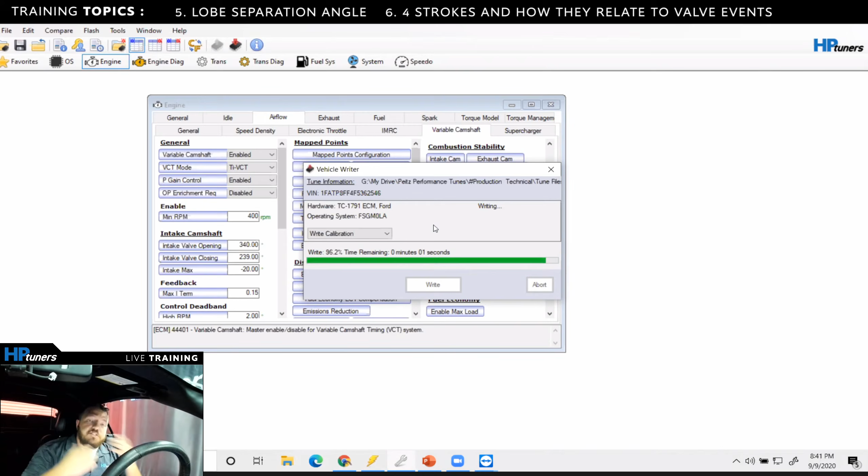Say that one more time, sorry. Right, yep, so you're asking about over retarding the exhaust valve, because you may be compressing the exhaust gases as the piston comes back up on the exhaust stroke. So what you were referring to is called pumping losses. We discussed pumping losses earlier, if you were around, but you may not have been - basically yes.

There's an ideal time to open the exhaust valve. If you open it too late, you're going to generate a lot of cylinder pressure, and that piston is going to have to fight that cylinder pressure on the exhaust stroke more so than if you open it up sooner.

Now, the main factor here is going to be your exhaust efficiency. With higher exhaust efficiency, you can retard your exhaust valve opening angle, and inversely your exhaust valve closing angle, more so because you have really efficient exhaust.

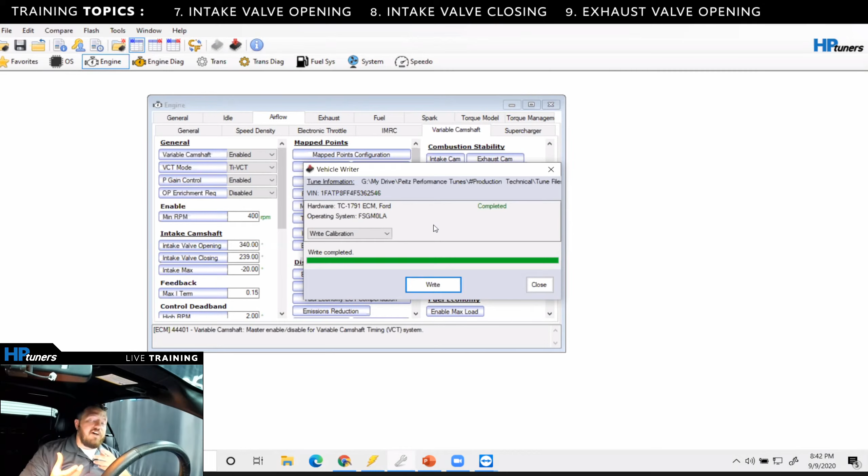Now, you could change some other things - you could change your exhaust valve size, and you could also change the exhaust port. This is where cylinder head porting comes into play, and your actual cylinder head guy who's going to be doing the porting will take into account your combination. Is it supercharged? Is it NA? Is it turbo? Is it nitrous? With any type of forced induction application, you're going to make some other arrangements, so to speak, with the head design, with the port design, with the exhaust valve design, to try to alleviate some of those pumping losses as much as you can, and also increasing the duration on the actual cam profile itself.

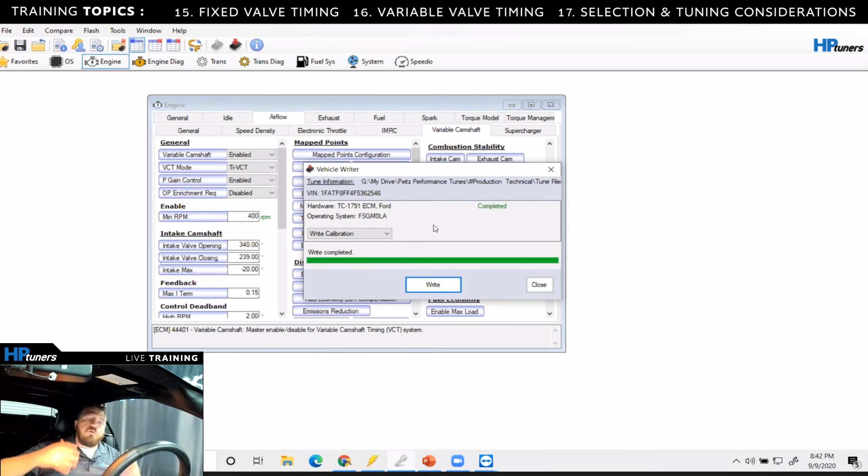So there's a lot of different factors that come into play when you're discussing over retarding the exhaust valve closing angle or exhaust valve opening angle. You just have to take those things into account to determine what's going to be the best time for you. And of course, if you have a dyno, you can test these theories and see what actually works and what doesn't, because theory on paper may not necessarily translate to more horsepower and more torque.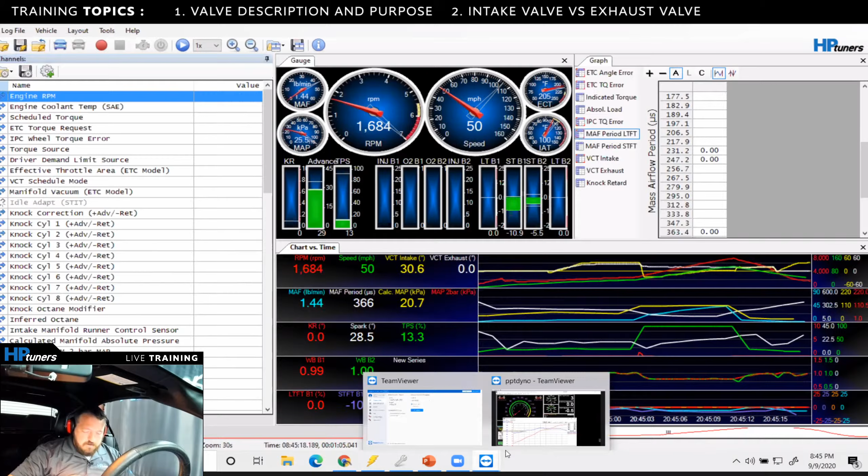All right, sounded pretty good. Let's see what we made, guys. Let me renormalize this a little bit. I think we might have actually picked up some power, and we were still climbing. That's awesome - so we went to higher RPM and we could actually see more power yet.

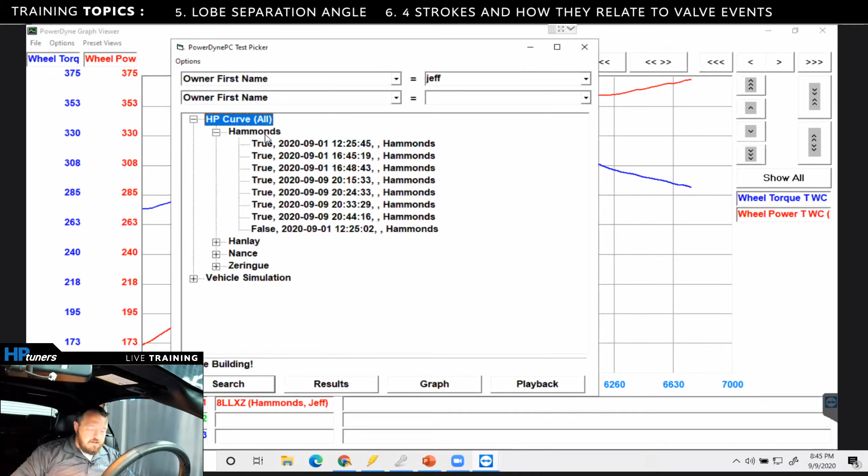So let's compare with our baseline. Here we go - yep, we gained power, guys. Not a whole lot, but as you can see, the trend was going up. We could have made even more power. So peak-wise, 1 horsepower. Now if I cut it off where you can actually see the difference, which is about 6,700 RPM, let's go to that.

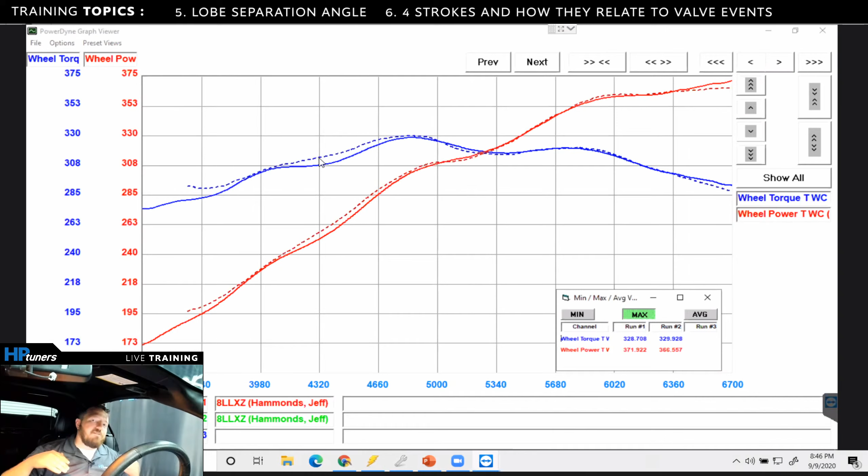Right. So yeah, we picked up about 5 horsepower on the top end, and anything in 5 horsepower - 5 more horsepower than what you had before is a good thing, right? So that's definitely good. Now you guys may see, okay, we made less torque down low. What you could potentially try there is just copying your values from your original file, and testing if you still get back to the original torque value or if you don't. But that would be for another day.

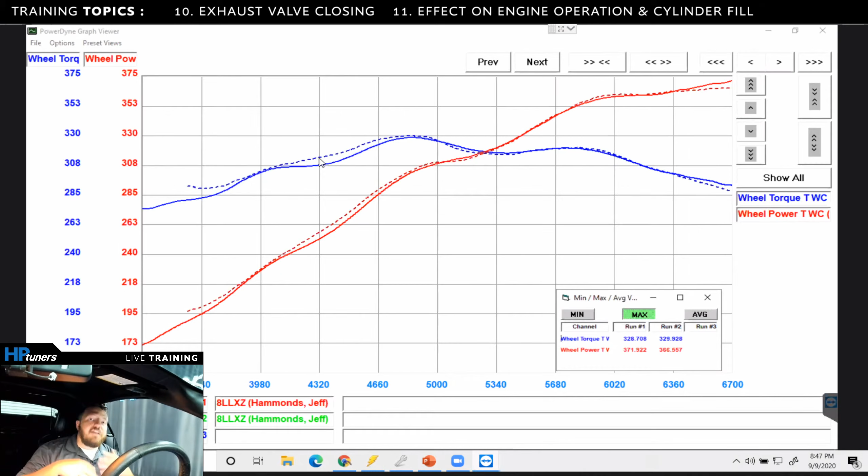You guys have seen the effects. You've gotten the idea of how retarding or advancing the intake valve opening angle is going to affect how the engine is going to operate. This is the tuning methodology, which is pretty widely accepted in our industry, as to how to gain power using the twin independent variable cam timing system, or TIVCT, as I say it. So that's really the way you do it.

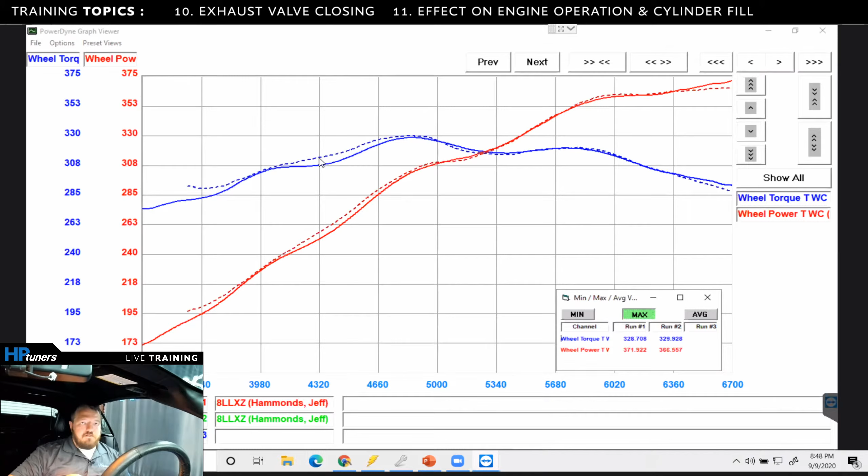Again, I'll ask one more time - how is the intake valve closing angle referenced in terms of the piston position? Before or after bottom dead center? What's the name?